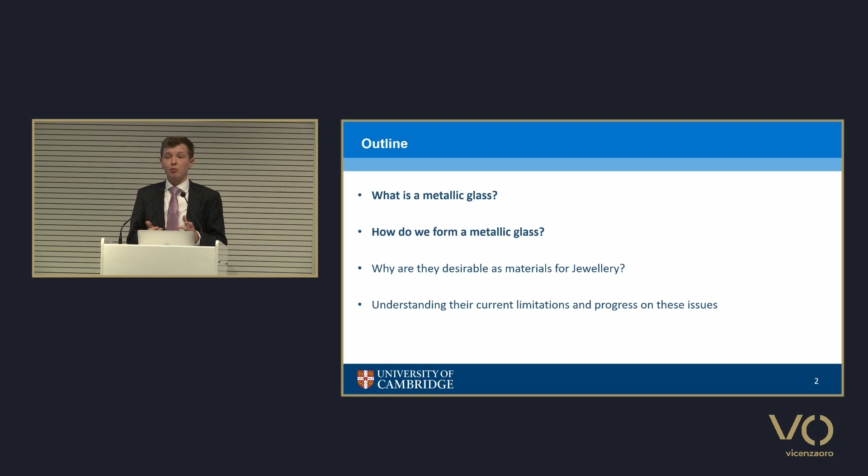So we will first discuss the nature of bulk metallic glasses, cutting out a little bit courtesy of Ulrich's kind introduction, and how they differ from crystalline materials. We will then discuss how metallic glasses can be formed. After this, we will discuss the advantages and desirable properties of bulk metallic glasses as jewelry materials and how they have the potential to deliver new opportunities. And lastly, we will discuss some of the current limitations and challenges facing bulk metallic glasses as jewelry materials and what recent work has been done and what work is currently underway.

So, as you all know by now, metallic alloys are typically crystalline. That is, all the atoms are arranged periodically throughout space, and we have something called long-range order. By contrast, a glass can basically be described as a hardened, cooled liquid. It has the structure of a liquid, but the resistance to deformation of a solid. It therefore differs substantially from conventional crystalline jewelry alloys.

So while it's tempting to draw comparisons of metallic glasses to polymers and oxide glasses, such as window glass and silica, we need to be careful because in those structures we have chains of atoms which are entangled together, which is not the case in metallic glasses. It's the atoms that are randomly distributed.

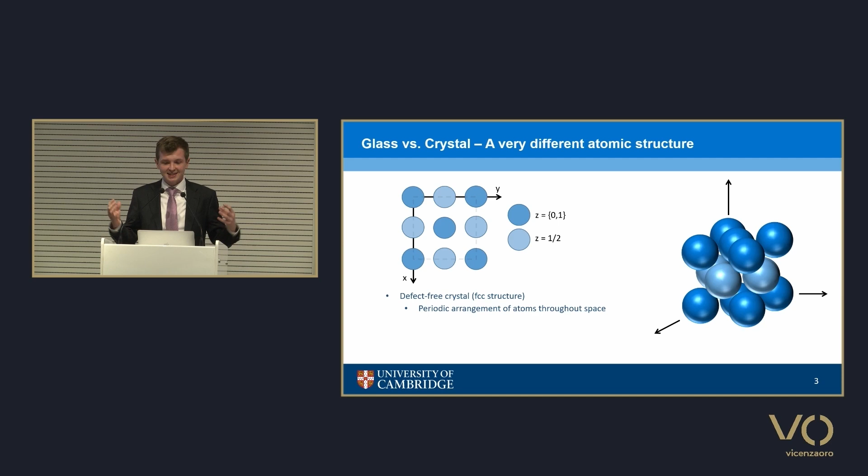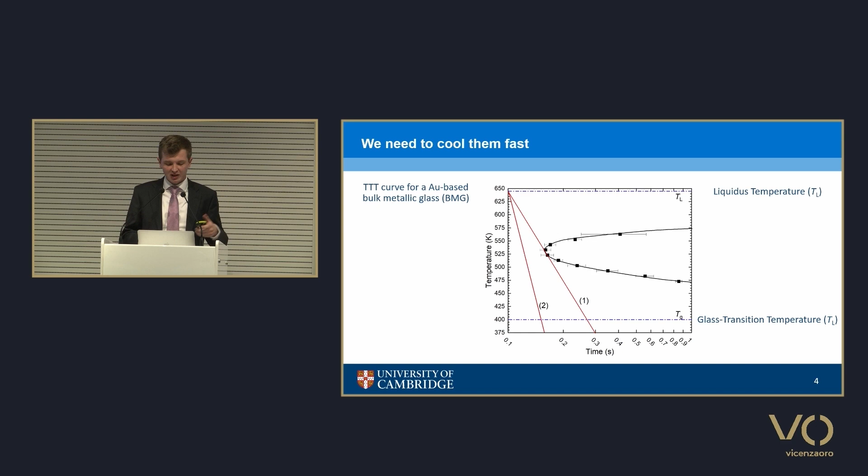So our aim from the previous slide is to push this C-curve as far to the right as possible. And we can do this by adopting several strategies in choosing our alloy. So first of all, as Ulrich was saying, we typically choose these eutectic compositions, so where the red line intersects the blue line. And that means that our liquid is as stable relative to the crystal for as long as possible. And so the temperature gap between here and where the glass transition would be is as small as possible.

Secondly, we will design our alloys with 4 or more elements. This does several things. It ensures dense packing within our liquid, so the atoms can't move around as quickly. But it also means that when it does try to crystallize, there will be many phases trying to crystallize at once. And so it's a bit of a mad rush, and ultimately none will crystallize.

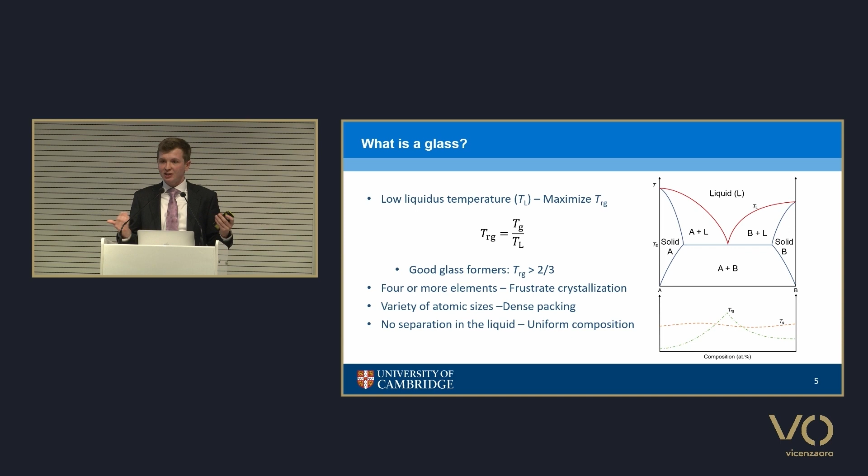Those atoms we choose quite carefully. So our elements are chosen for varying atomic sizes. This helps promote the dense packing. And we also want to make sure that chemically they all like each other the same amount so that we don't get any phase separation.

So that's a very quick introduction to the principles of how we form metallic glasses. We will now go into why they are useful as jewelry materials. Metallic glasses have been used and proposed for various applications, ranging from biomedical implants to now space applications. But they're probably most famous for their use in electrical transformers, where they have very high resistance, and so there's

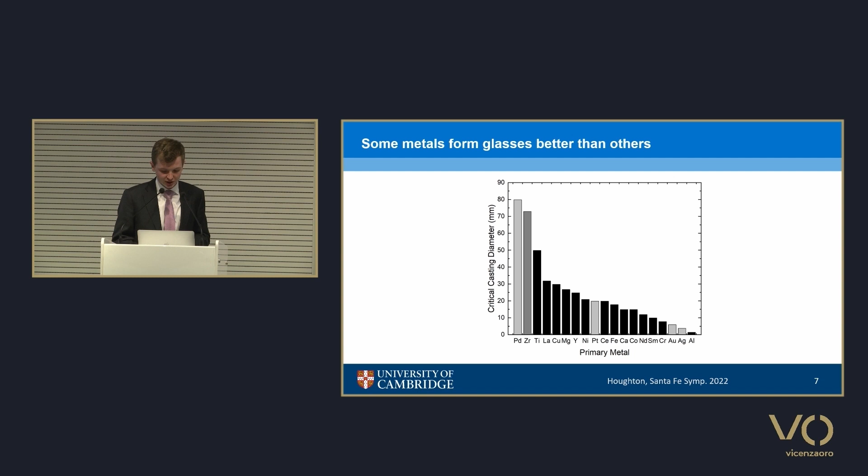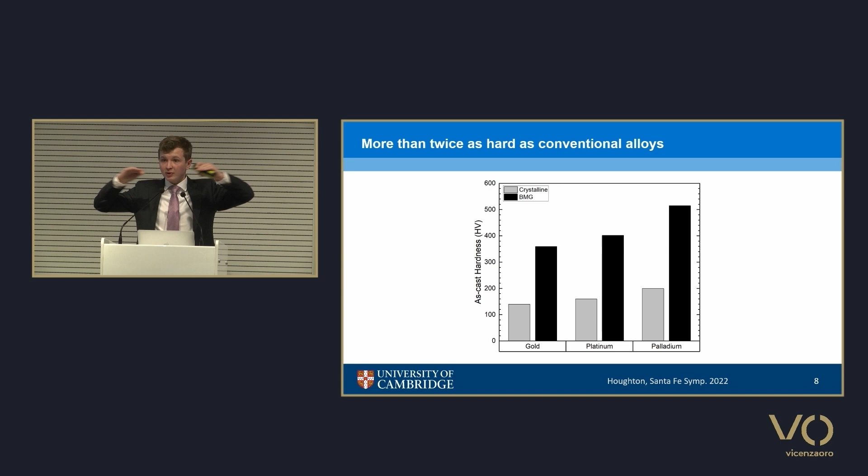So one of the main advantages of BMGs is their hardness. Here we've got a chart of different metals, the crystalline alloy and a BMG of comparable fineness. And as you'll see, the hardness is typically at least twice as high. This is due to their atomic structure. Whereas in a crystal we have layers of atoms that can slide easily over one another, they don't exist in the glass. Glass is actually deformed by a mechanism of shear bands, which I won't go into. But ultimately it means we have very high elastic strains under large loads. And so we don't see macroscopic ductility in the same amount, but we do have much higher hardness.

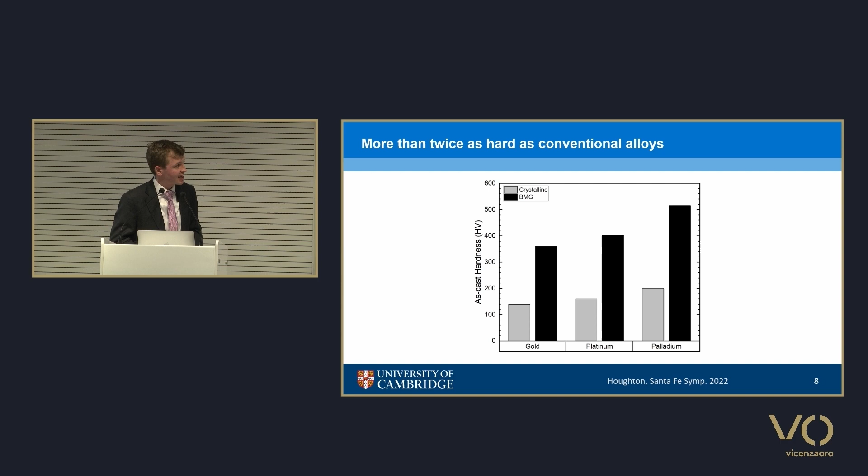So you've seen this video already, but it's worth demonstrating again because it's quite incredible, really. I thank Ulrich for letting me use it. As you'll see, the elastic behavior is quite incredible, and it actually sounds a lot like a rubber ball simply because of that elastic phenomenon. Failure here will occur by the shear bands, but that occurs at much higher strains, allowing the ball to bounce as much as it does. And again, we get new design opportunities courtesy of these metallic glasses because of their high elastic properties and the fact that because they're so hard, the gems won't deform the metallic glass.

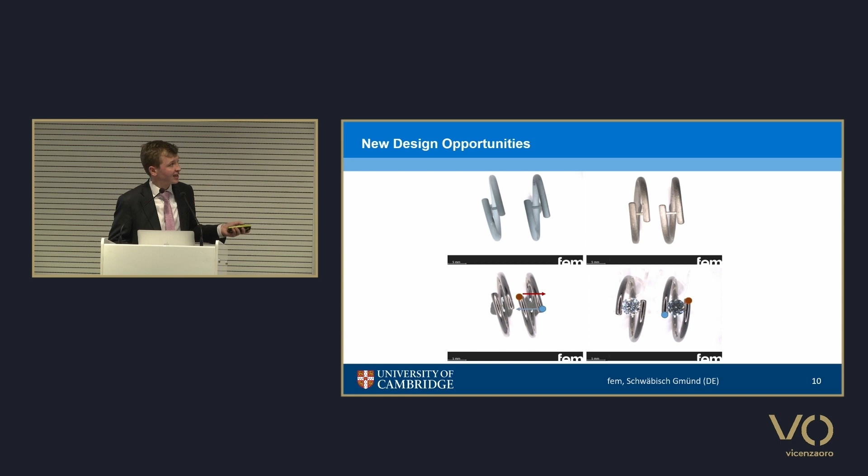In terms of processing, Ulrich talked in great detail about investment casting, but there's also this advantage that because metallic glasses are so much like polymers, there's a process very analogous to plastic injection molding. There are several companies that are able to do this. The key advantage is time. As you all know from Ulrich's talk, we have minimal shrinkage on casting, and we have very good surface finishes. So we can actually cast rings in a matter of seconds, as opposed to the relatively long time for investment casting.

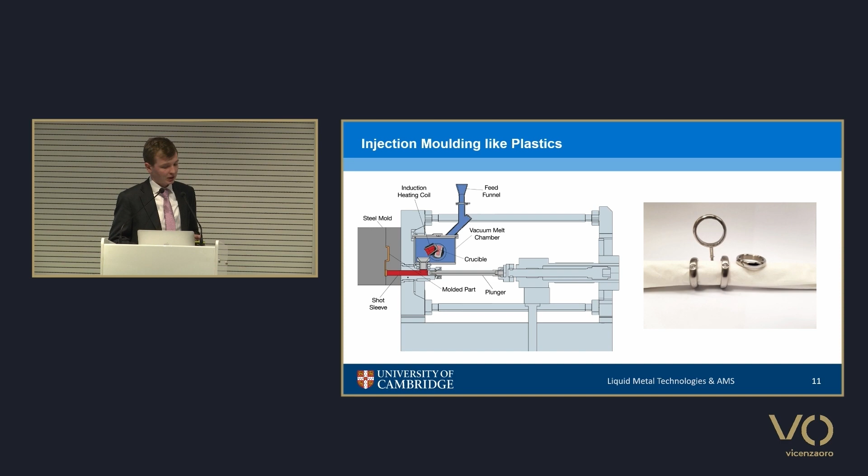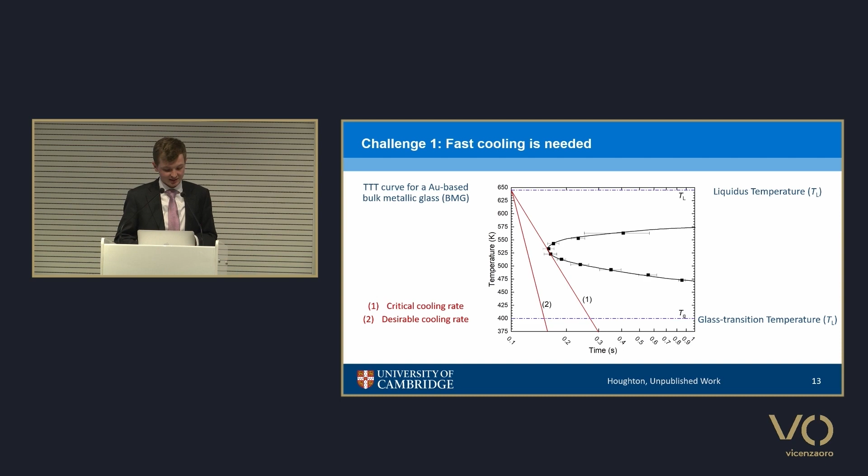Next slide. So we'll now go on to the current limitations and progress on the issues. As we've already mentioned, we need extremely high cooling rates to form metallic glasses. Not only does this create issues with forming thick sections and forming glasses in the first place, it will also create many issues with form filling, so we have to be careful about the design of our castings. The other issue is generally regarding hallmarking standards or stamping regulations. This is a bit of an expansion on the graph that Ulrich showed, to include the platinum, palladium and gold systems.

For all commercially available systems at the moment, gold is preferable, largely because there's a much larger composition space to work within, thanks to the 18-karat hallmarking standard. But for our platinum and palladium systems, we're right at the cusp of the 950 hallmarking fineness. The large issue is that given we need about 15 atomic percent metalloid or other additions to form a glass, we can only be using a certain range of light elements.

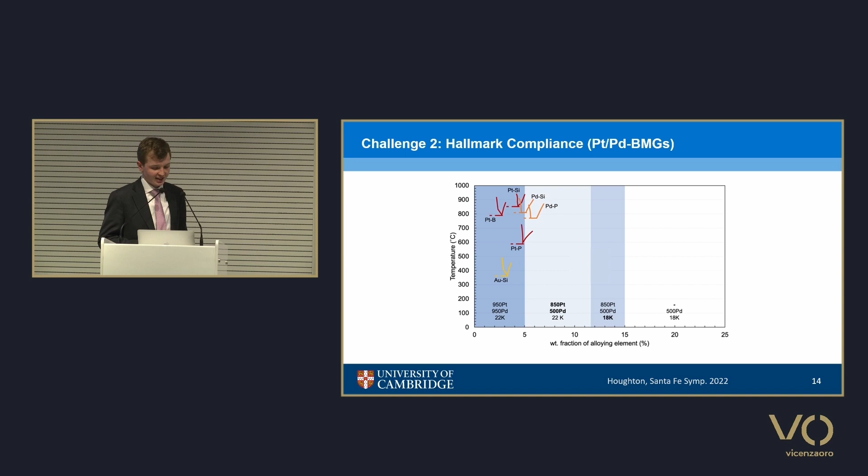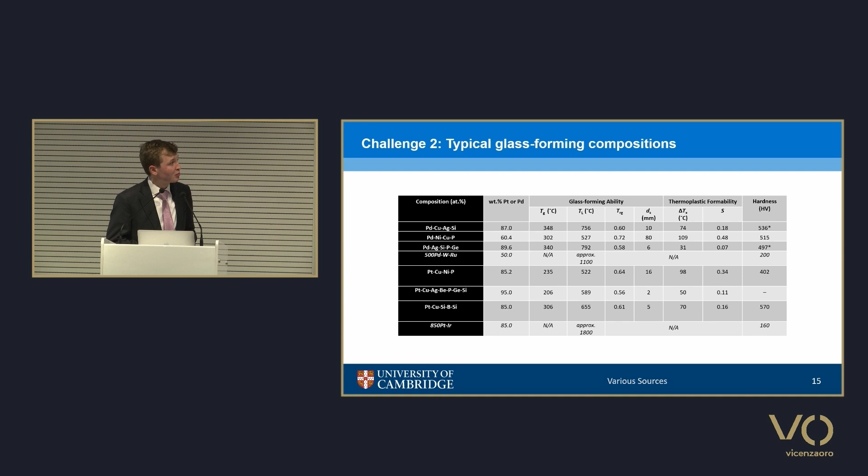I show a table, with some of the figures you may have already seen, but you'll see that as we go to higher finenesses in our platinum and palladium systems, we typically have critical casting diameters dropping off markedly. These ultimately mean that they're of little commercial use at the moment. We'll also see a drop in thermoplastic formability, characterized by this S value here, and that's of importance for the injection molding analogs.

So when we cast these alloys in air, in general, we will get a crystalline silica layer that forms on the top, and that is in fact passivating and stops this tarnishing occurring. But with polishing and general wear, that surface layer gets removed, and then we see this tarnishing phenomena starting to occur. So the first behavior to occur is this outward diffusion of copper from within the glass, which is actually able to oxidize the silicon that wouldn't occur otherwise at room temperature. And ultimately, that leads to these, well, they're not dendrites, because they're not crystalline, we use the term dense branching morphology. But in essence, we have this inward oxidation of silicon and the outward depletion of copper, which leads to this reddish-brown appearance on the surface.

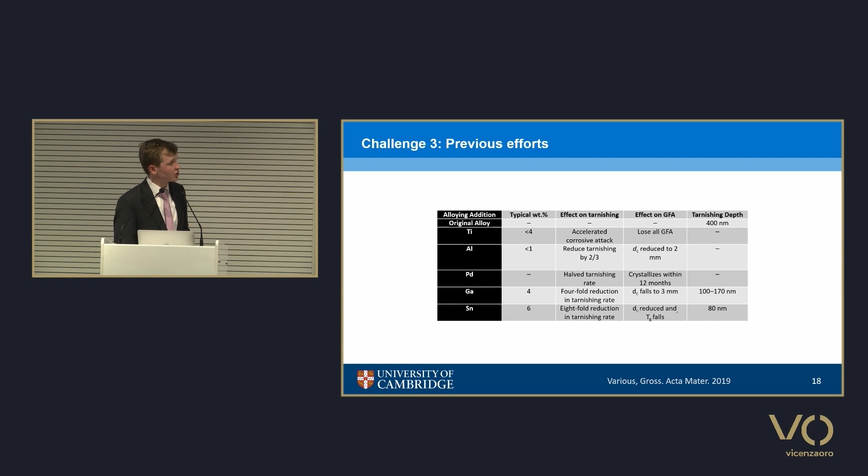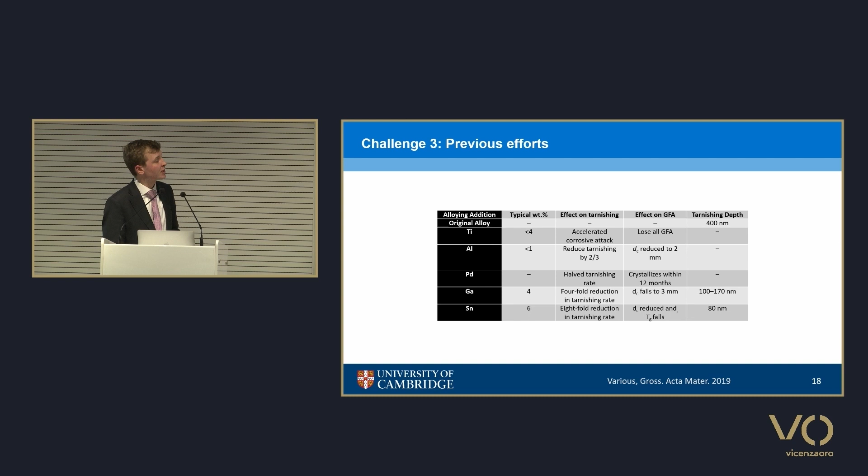So what might we do to solve this? There's been very many attempts to try this. So at first, people started playing around with the copper-silicon ratio and removing elements such as palladium. But ultimately, that tended to lead to a loss in glass-forming ability, and so we can cast in even thinner sections than we could already. People have tried to add other elements in order to try and stop the tarnishing behavior. And in general, we see some improvement in tarnishing behavior. So this is the tarnishing depth of that corrosion scale that I schematically show here. And you'll see some improvement, but ultimately also a drop in our critical casting thickness.

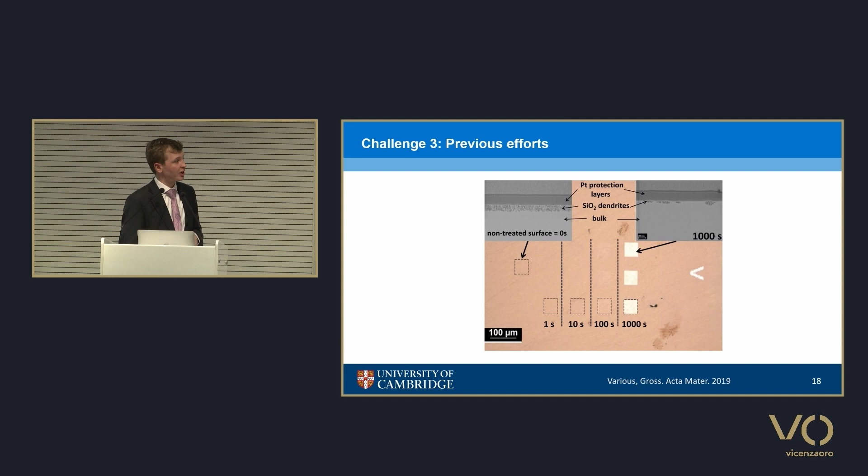And so perhaps the best achievement to date is by Oliver Gross and Nico Neuber. And they were able to take, sorry, that's not the Schroer's alloy, that's their intermediate alloy. And then ultimately they were able to get down to tarnish scales of this value, which you can see are much whiter than they would be otherwise. But unfortunately, they had to use an effect called ion implantation. And that requires a gallium ion beam and is of limited industrial use, largely because wear will remove that surface layer, but also it's very difficult to do that on non-flat surfaces.

So during the course of my PhD, we've taken a slightly different approach. So rather than working on high glass-forming alloys and improving the tarnish resistance, we went right back to the start and considered all the elements in the periodic table and which ones would be glass forming using the principles that I outlined before. And we identified good glass forming systems and then tried to improve the glass forming ability from there onwards.

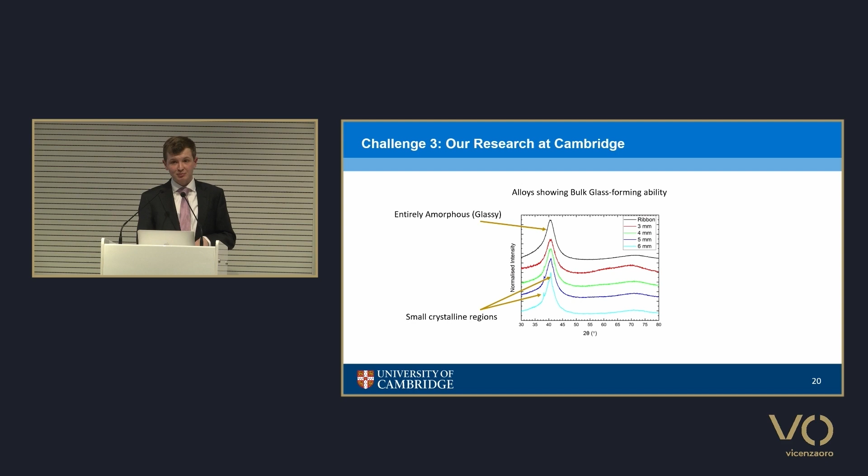Obviously, that's only one half of the story. We've got to improve the glass formability as well. So these are X-ray diffraction measurements. So these are these thin cast ribbons that we start at, and these are about 100 micrometers in thickness. And then we try to develop even thicker castings. So as you will see in the samples at 5 and 6 millimeters, we start to see these crystalline peaks. And that's indicative of some crystallization occurring. We think they were to do with palladium silicides, and so there is room for further optimization. And so hopefully we'll be able to pair this with this, but for very thick sections.

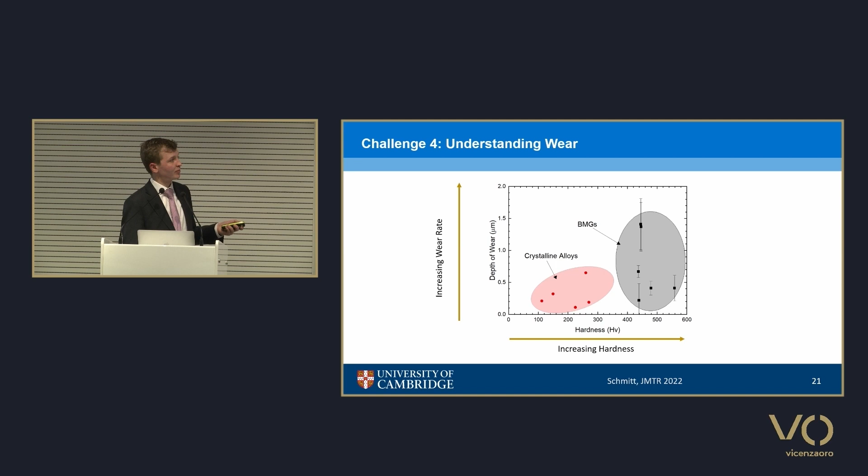Other work we're doing is kindly in partnership with Ulrich and his colleagues at FEM, and we're starting to look at the wear behavior. So it's generally understood that wear resistance would scale with hardness. That's known as Archard's law. But in a recent publication by Ulrich and Lisa at FEM, they found that that's not so much the case. And so BMGs might not perform as well as first thought. And so there's some quite fundamental work to do to understand that. So using the extensive testing and characterization facilities available at both Cambridge and FEM, we're hoping to understand this phenomena to make more industrially viable alloys.

So in conclusion, we've come quite a long way in metallic glasses. So we started off in the gold system in the 1960s. That was over at Caltech. And in the 60 years since, we're almost at the point of hallmark-compliant bulk metallic glasses. And so going forward, we've got these harder and hopefully more scratch-resistant alloys in many cases, but not all. There are new design opportunities, and there's also the case for faster, higher definition production that could rival technologies such as MIM. Unfortunately, there's still challenges to go, and that's largely about developing these tarnish-resistant compositions, achieving high glass forming ability with high fineness, and also understanding the wear phenomena.